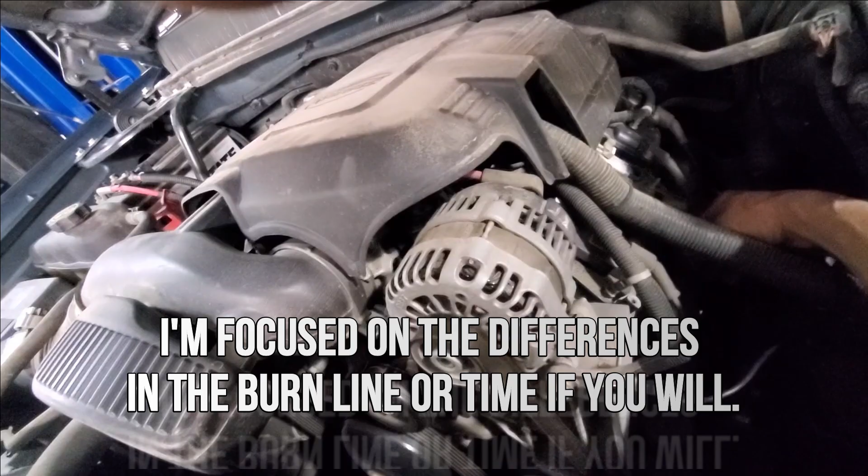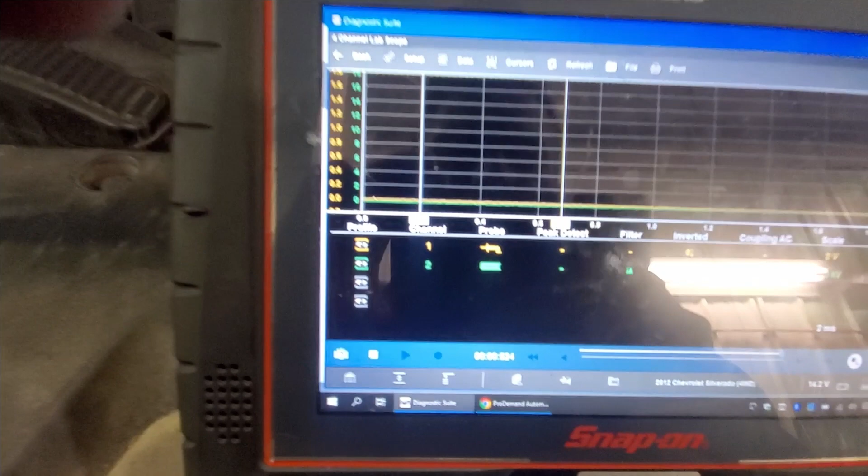And we had misfires on several other cylinders as well. Alright, let's see what we got here. We are on, just so you know, a 2-volt scale on trace 1, which is our yellow trace, inverted just because I got my amp clamp on wrong like usual. And then 20 kV ignition probe. We're on our ignition probe setup. Filtered, of course, and then 2 millisecond screen for the 20 kV scale to get that secondary capture.

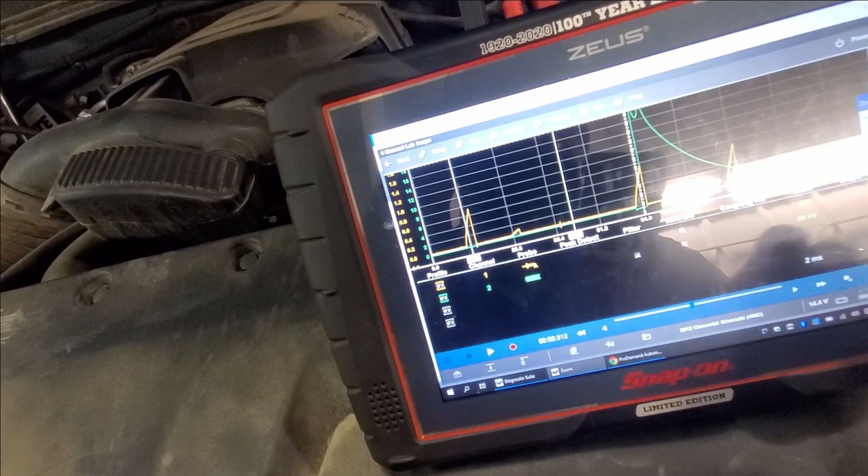Let's go ahead and take a look at this, see what this number 3 cylinder looks like. Zoom in on that. Come back out again a little bit here. So I don't know if you can see that, the difference there at idle. Let me come out a little bit more. I might have to increase my scale here so you can see it a little better. Let's go to a 50 kV scale. Stop, zoom. Yeah, there. Should be able to see that a little bit better now. Zoom in on that.

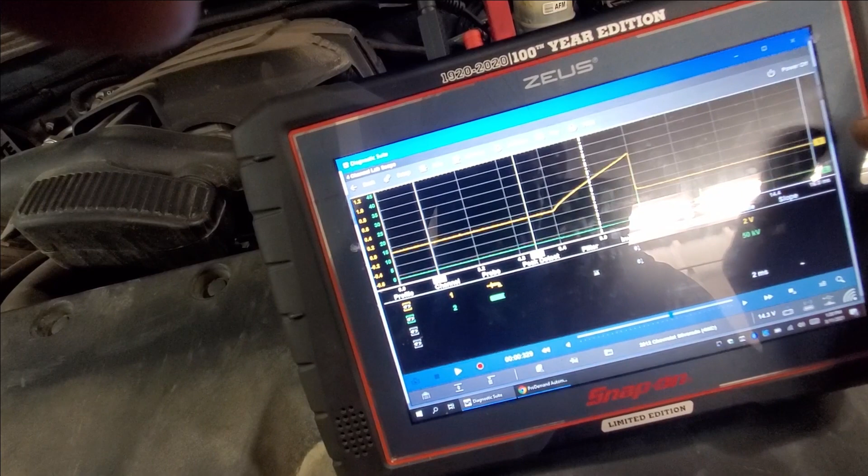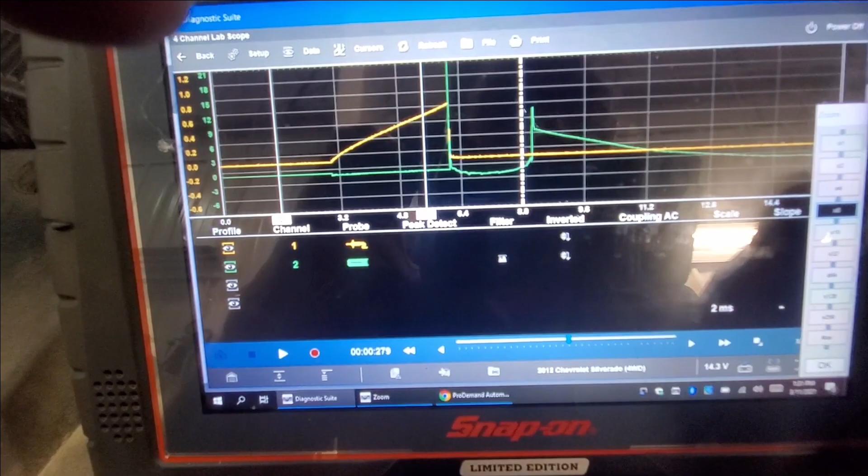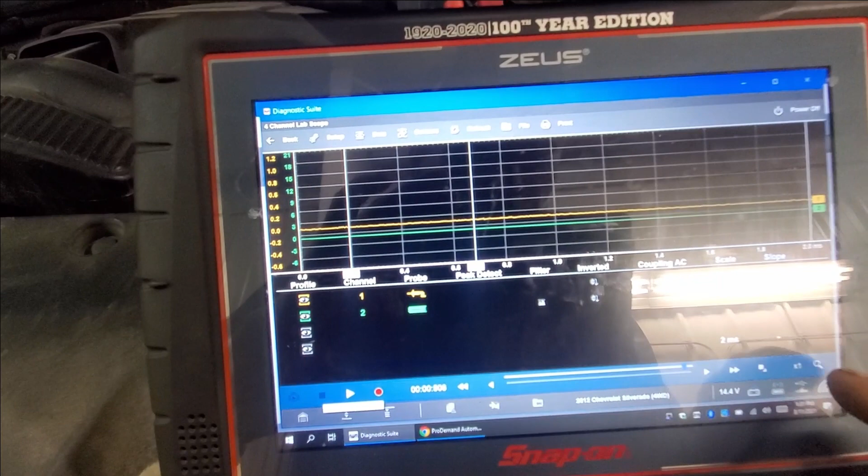Alright. So we'll bring this up. Again, here's our primary. This is our secondary. Oh, that might be too much. Hold on. Come back down to a 30 kV. Alright. Zoom in on this guy right here. So there's our secondary capture on cylinder number 3. Back to number 1. That one.

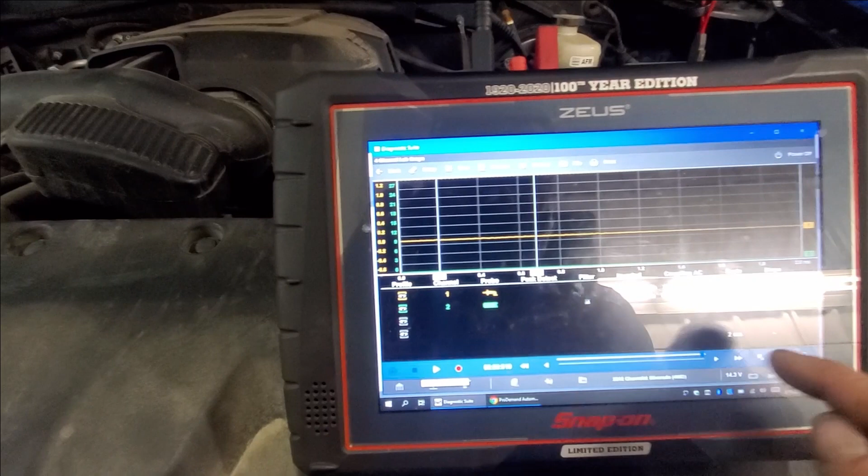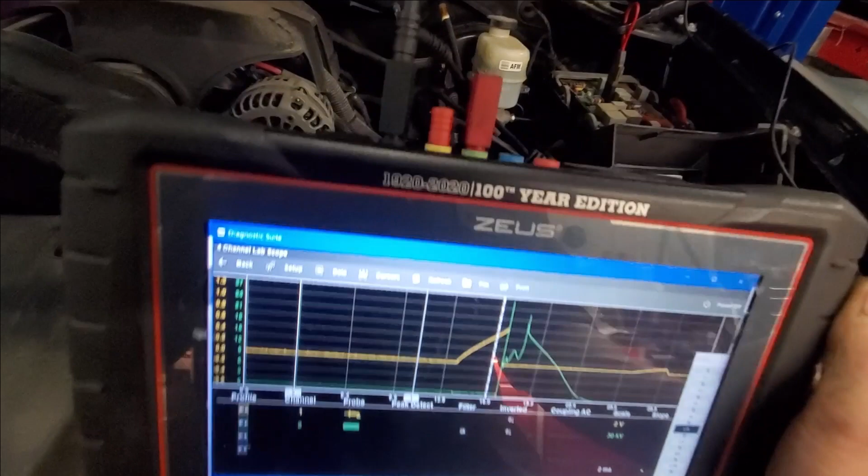So see that turbulence in there, right? That is in our burn time. So let's swap those spark plugs and see if the pattern moves with it. So that's what I believe we have as a secondary issue. Wait 1 second. All right. I guess before we do that, we'll do a quick clear flood and let you guys listen to it. Sounds good to me. Definitely not a compression problem or a mechanical problem.

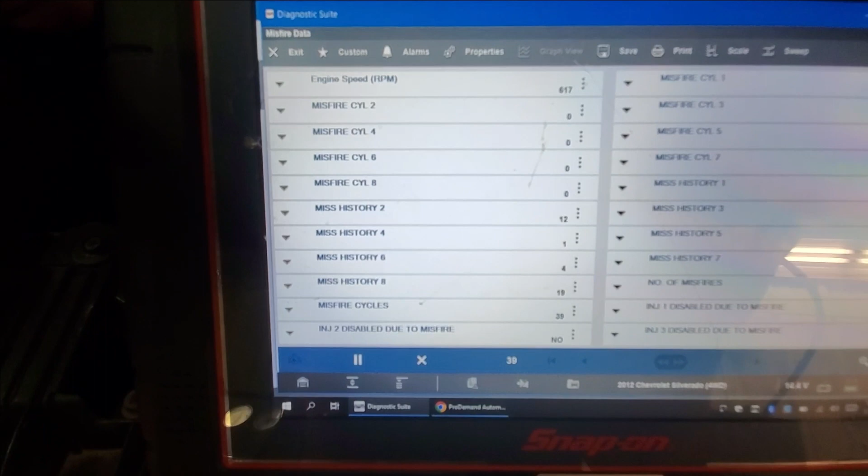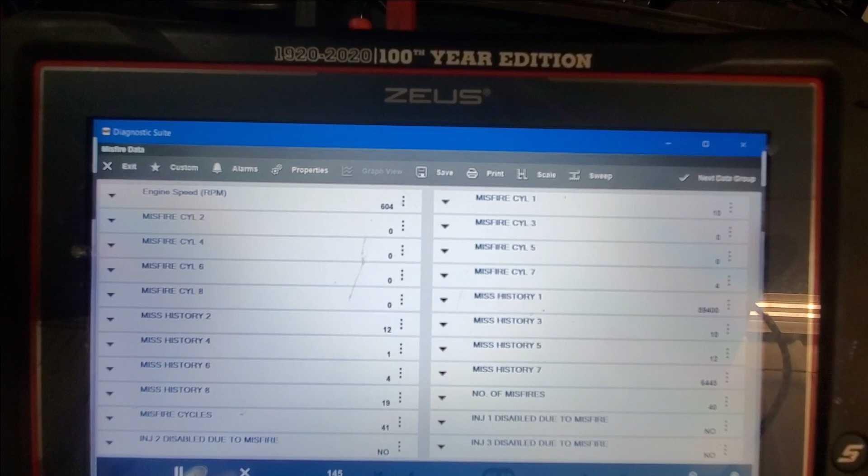Alright, since we got it up, let's take a look at some misfire data real quick. And you can see we have our miss history down there. Cylinders 2, 4, 6, and 8 had a few misfires. You can see we had a lot of misfires on cylinder 1 and quite a few on cylinder 7. You can see cylinder 7 is missing, as well as cylinder 1. Okay. 7 and 1. Consistently misfiring on the current counters.

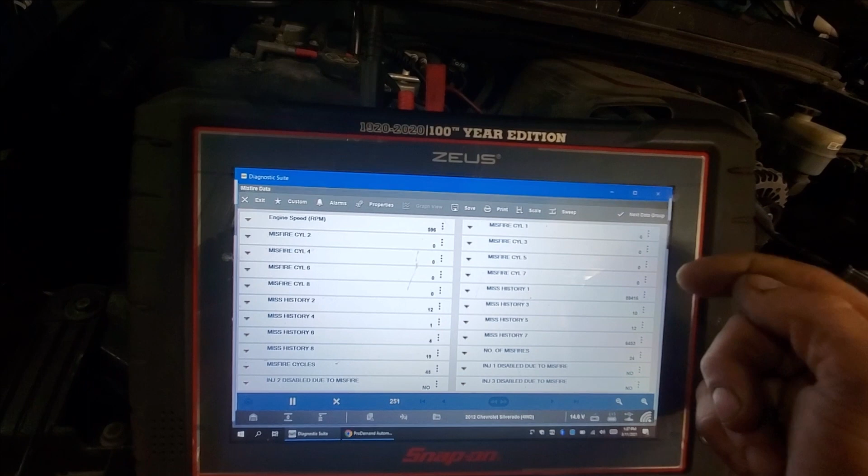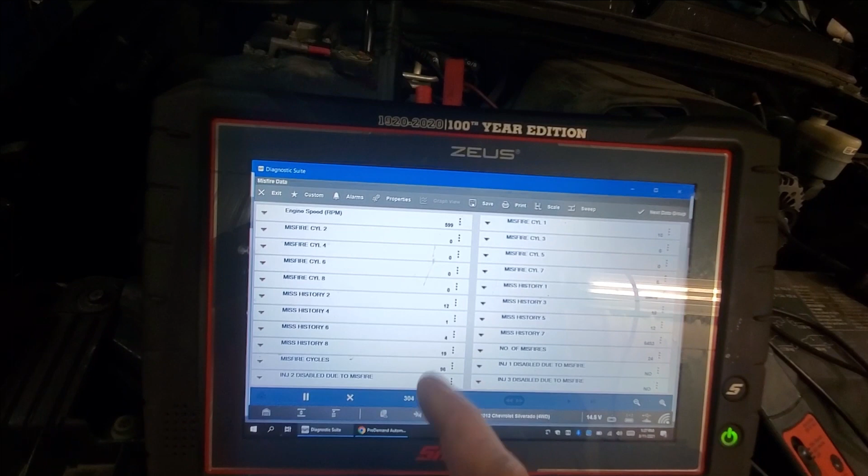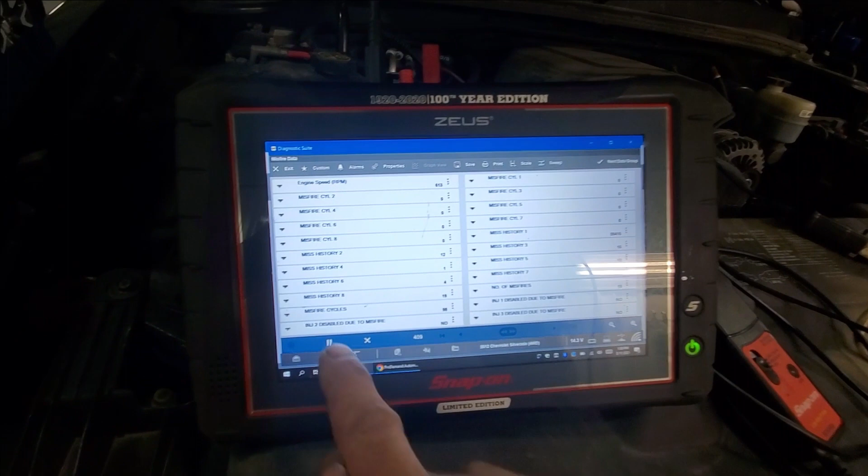Yes, I'm aware of the carboning of rings, so we'll keep that in mind. Also got to remember 1 and 7 are AFM cylinders, your active fuel management cylinders, so something to keep in mind. But we're at idle right now. Just observing, it looks like it's got original plugs and wires in it, so that's an observation. Let's see here, what do we want to do next? We're going to swap plugs, right? Why is my brain not working right now? Yeah, that's what we're going to do. We're going to swap them. So, let's do that.

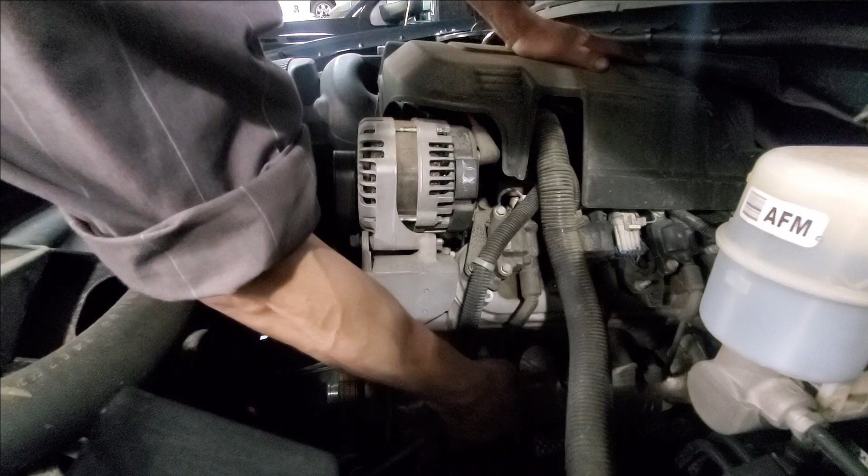Alright. Just going to swap out number 1 with number 3. Spin these a little bit. And the reason I'm doing this is because it's the easiest way to do it on a Chevy, in my opinion. To each their own though.

Like they say, there's multiple ways to skin a cat. Run it over with the car. Throw it in a sack, throw it in a river. I'm just kidding. Just kidding, I like cats.

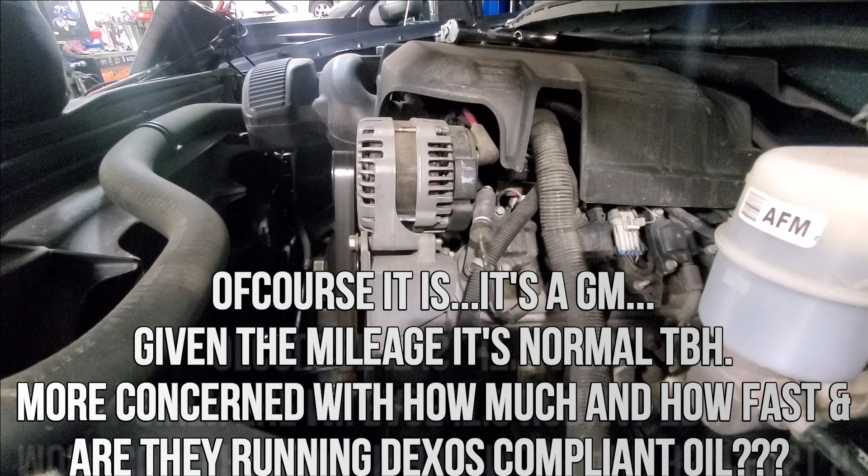Alright. Let's take a look. Uh-oh. A lot of weight. This thing's burning oil. Yep, burning oil. Oh boy. That's not good. Time to soak the cylinders down with some BG or some top end. I might have spoke too soon. Let's update this valve cover right away. Put the updated valve cover on it. Oh, come on. Of course I ran it, so it's piping hot. There we go. Alright.

I don't even know what the mileage is on this thing. I didn't even look, to be honest with you guys. Kind of doing things backwards today. I'm in one of them moods. But we're still going to swap them. But, you know, are we dealing with a fouled plug because of oil burning?

Alright, let's see what this one looks like. Yeah.

Does Nate like a piece of butterscotch or a... Oh, Paul, you are my butterscotch, Paul. When you came over here and asked me if I wanted some butterscotch, Paul, I was like, you are my butterscotch. Butterscotch pudding. Oh, I'll give you some butterscotch pudding. Oh, no, I'm good. Thank you, Paul. Ooh, is that a mint? Yeah, well, no, it's a candy cane mint. It's kind of like the mints I leave on your sister's pillow when I'm done. I am. Yeah, but that's good. You're that good humor anyway. Yeah, that is good humor, Paul. Yep. That's what makes life worth living. Like you're gonna keep making a mess of the sink because I got one on top of you there. Paul, I am a mess.

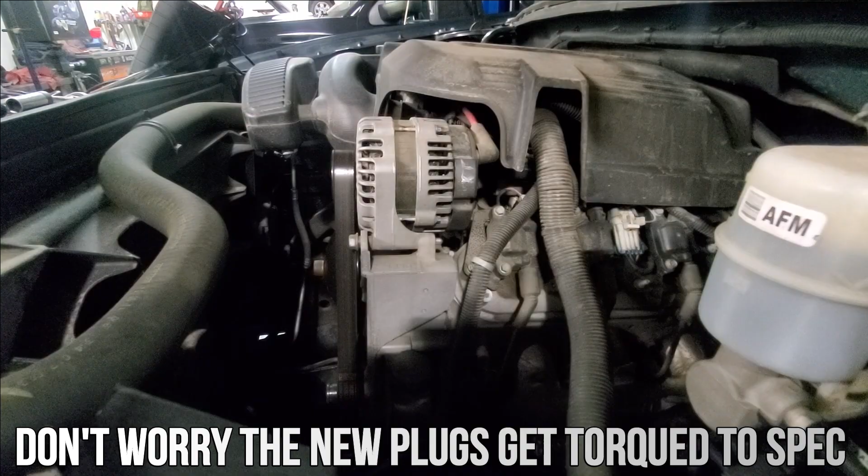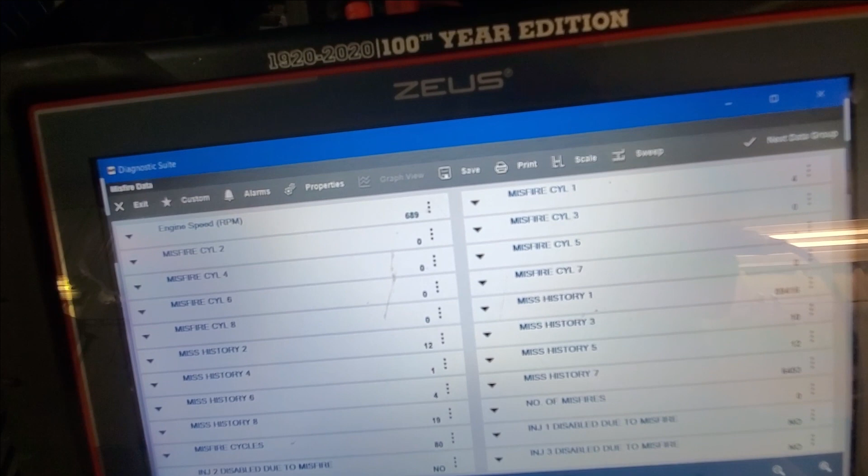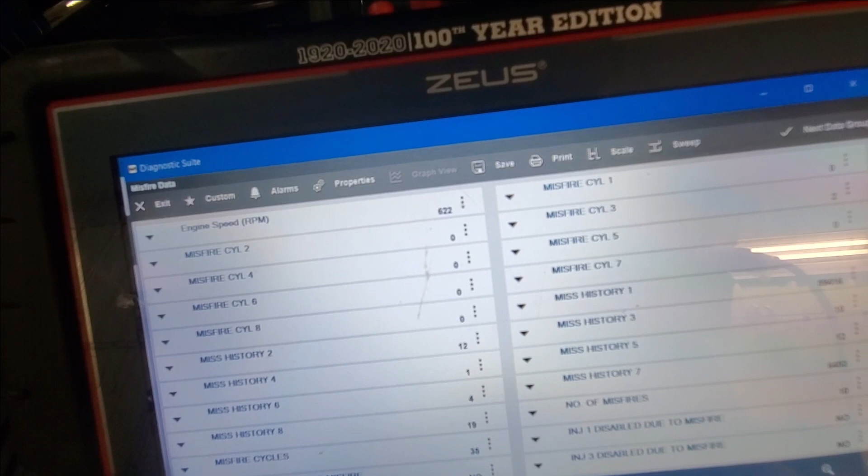Right. All right, well, we're going to see if this misfire moves. All right. Okay. This thing is still recording. Well, hey, while you're in here, you want to fire it up? Thank you. See if our number one misfire moved. Oh boy, sure did not. Sure did not. Oh, yes it did. Said coming out of 4-wheel drive, it just kind of acts up. But there it is. There it is.

Yeah, we got fouled spark plugs. Okay. She's burning some oil, man. All right. So clearly we have a plug problem, right? That was that turbulence we were seeing. So, is she probably burning some oil? Well, she's got 149,000 on it. I looked at that. So, yeah, probably burning some oil. I could recommend doing that service on the rings. Just let them know, it's probably bypassing a little bit. Is what it is. Or just throw a set of plugs and wires in it and call it a day.

But I'm pretty confident that the plug fouled out just from mileage. And, of course it's going to burn a little oil. I mean, it's a Chevy. Let's just be clear here. And it all depends on what kind of oil they've been running. If you're not running Dexos, that's a big deal. So let's get some captures on, well, really, we don't need to get captures. You already know, right? Just by moving the plug.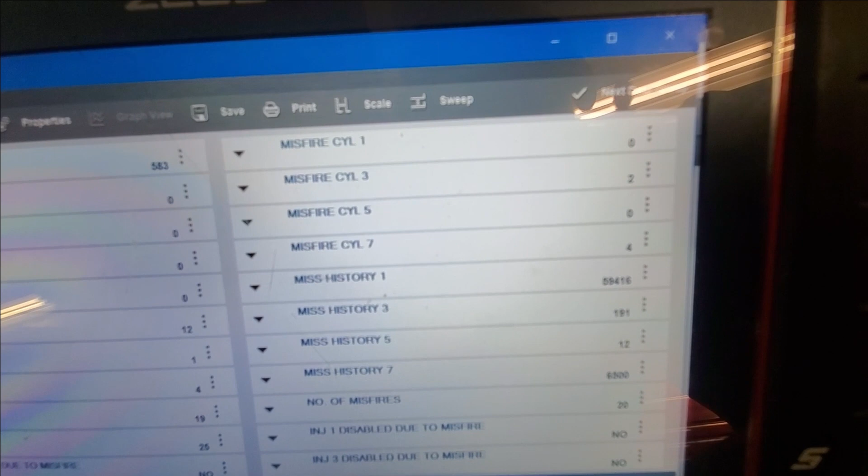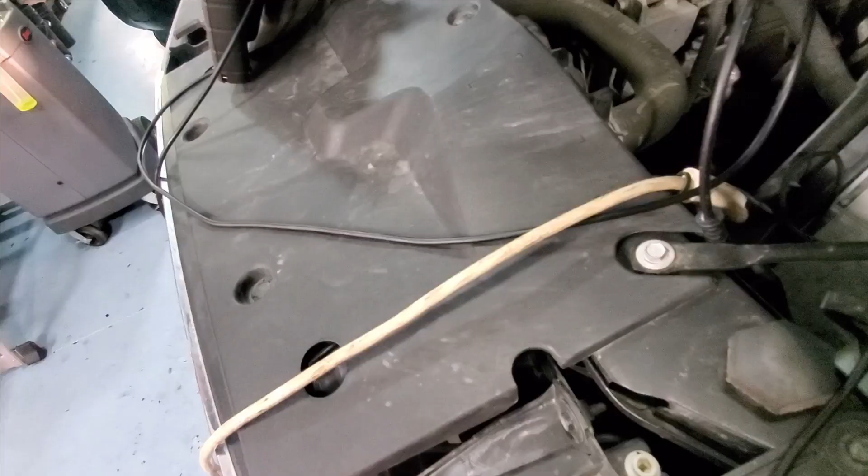Cylinder 7 is also counting up. Well, you can see now too, like cylinder 3 has kind of stopped counting. Oh, there it is. A couple on there now. So 7's another problem child. Like I said, 1 and 7 are your shutdown cylinders on this bank 1. What'll happen is there's an update for the oil pressure relief valve that lives in the oil pan that a lot of guys should know about, but there's a deflector that you're supposed to put on there. And that prevents it from slinging oil up onto the bottom of the piston on number 7 and causing a compression problem. Okay, I forgot where I was at.

So here's what we're gonna do. We are gonna recommend doing a Valvoline GDI or induction and injection service. This thing's got 149K on it, and we'll advise the customer that we believe it's burning a little bit of oil. Oh, when was its last oil change? I'm looking at the history here, guys. Well, it wasn't here, because the last time it got an oil change here was at 126,000 and we're at 149,000. So hopefully they've been putting Dexos in it. So let me check the oil level real quick. I mean, it's going to get an oil change with it. I'm going to highly recommend one.

So Valvoline, we do Valvoline here, BG or any GM top tier, whatever induction service you want to do. That should help quite a bit, actually. I've had pretty good success with it without doing where you actually pull the spark plugs out, dump it in the hole, let it sit overnight, come back in, blow it all out, and then rotate the cylinders over to loosen up the deposits on the rings. I guess we got to find out how much they've been consuming and if they've been running Dexos or not. Nevertheless, my recommendation is going to be to do an induction, injector service, some plugs and wires, and an oil change, and ship it. And it'll probably be just fine. Not probably, it will.

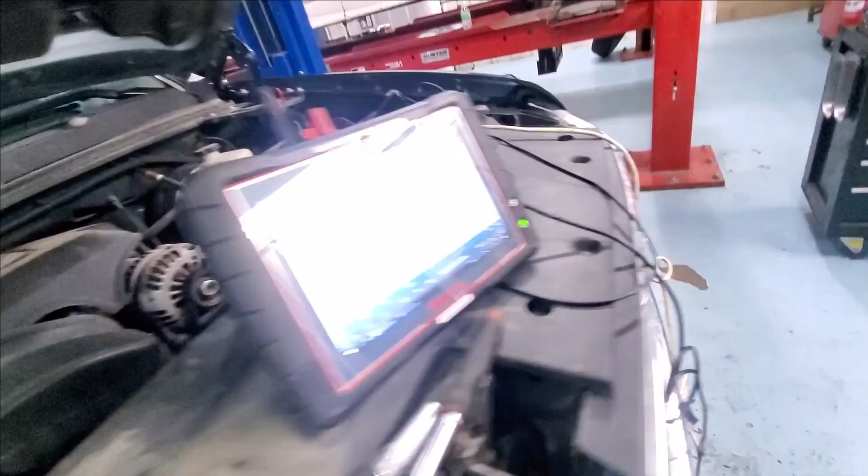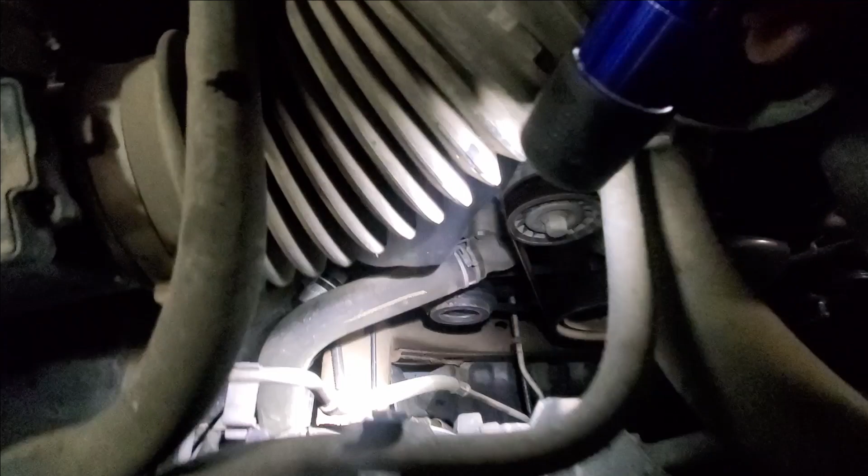Let's take a look at that oil level. Alright, that ain't low. Don't smell like fuel, at least nothing out of the ordinary. Yeah, oil cooler lines are leaking. Time for both sets of belts. Oh, tranny lines are leaking. Yep. Valve covers are surprisingly dry. That looks good.

This oil pan puked out. Not too bad. Them oil cooler lines are puked. I better double check the front here. Oh. Surprisingly dry. Oh, is that all coming from? It's gotta all be coming from the cooler lines. Yeah, it's coming from the cooler. Alright, well, we'll let them know about that.

Why do I see some oil on the back side of that head? Is that oil? It is not. Okay. Alright. Very good. Alright. Can number 1 of our intake cleaner. Running her through the throttle body.

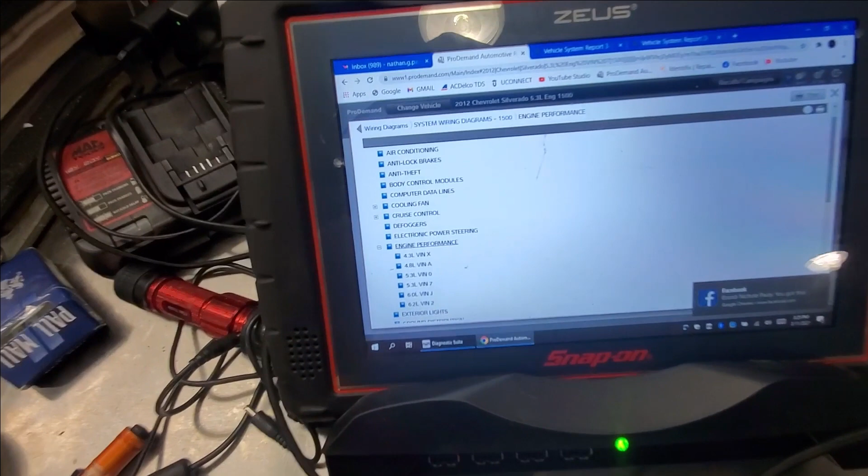Alright. Let's figure out how we're going to disable this fuel because this induction service is pretty much done. We got a VIN 7 5.3, so I got to figure out which fuse I got to pull to disable our fuel pump. So we're just going to find our fuel pump. It's not that one. That one is if it has multiple tanks, which this doesn't. Let's see here. Fuel pump, trailer brake control module with integrated brake. Okay. So we're gonna disable our fuel pump module up by the spare by taking its battery positive away, which is gonna be this one right here, our FSCM fuse 21, 20 amp underhood fuse block. So let's find that.

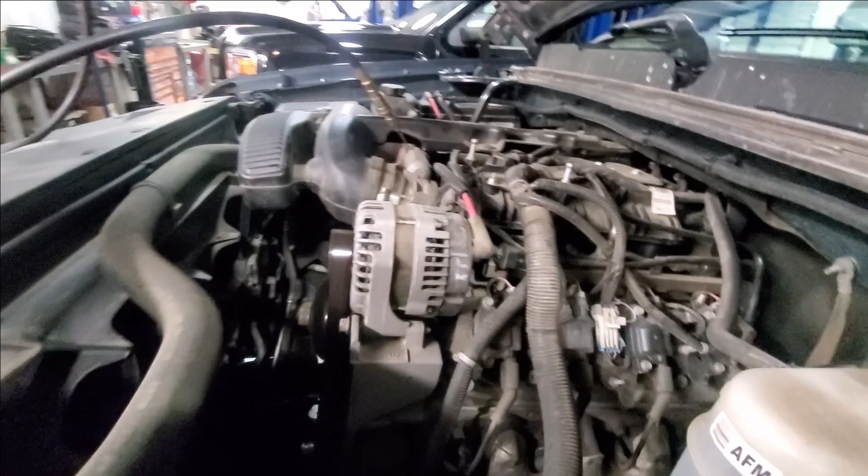So it's still running the induction service. I'm just gonna let it run as long as I possibly can, because even though I induce it at 70 psi, it'll still pull up in the intake. Then of course we'll have to take it for a good 15-minute test drive to burn out the rest. The stuff continues to work long after the actual service.

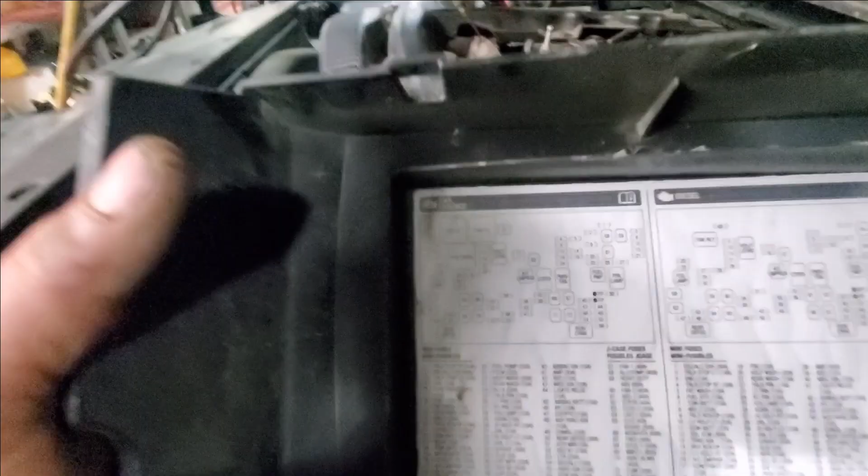So let's see here, FSCM fuse 20 amp, fuse 21, there it is, 20 amp, and here it's a 25 amp. Fuse 21, where are ya? Oh geez, there it is, right up there. Okay, so this is 25 amp right here. We're gonna pluck it. Got my fuse puller here. That'll disable our fuel.

And the way you know these are done is when you shake it, you'll see little drops coming out through the sight glass where it goes in. And you'll also see your pressure drop on both gauges. So I know the tank's empty. So we're just gonna shut her down and disconnect that connector, reconnect the intake pipe to the throttle body, and then we just got to disconnect fuel here. We'll cycle key, confirm that we do have fuel disabled once we pull our fuse, and then we just hook into the rail and add our fuel rail cleaner, and we'll run our fuel service. That takes the longest. We'll just run it till it dies, and then once all that's done, start doing our plugs and wires, okay?

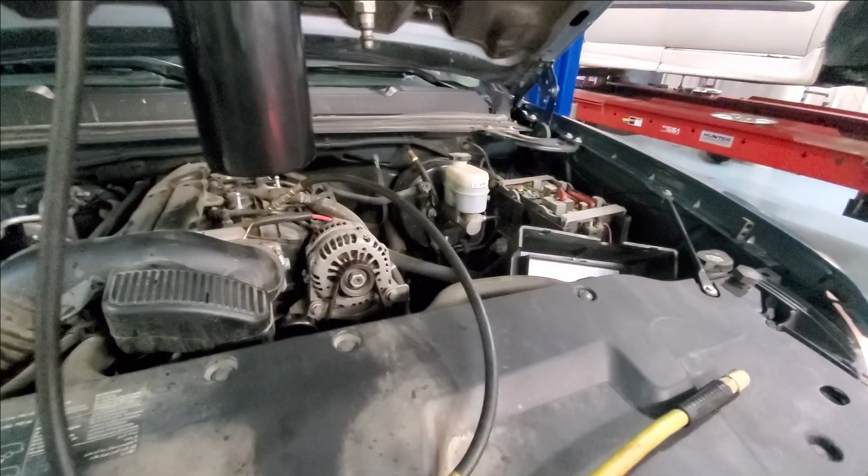Alright, so let's disconnect this. Disconnect the air. We're going to open up the relief valve here. There we go. We'll disconnect this. And shut our valve. And then fill our tank. Let's go ahead and pull this fuse right away. Alright, fuse is out.

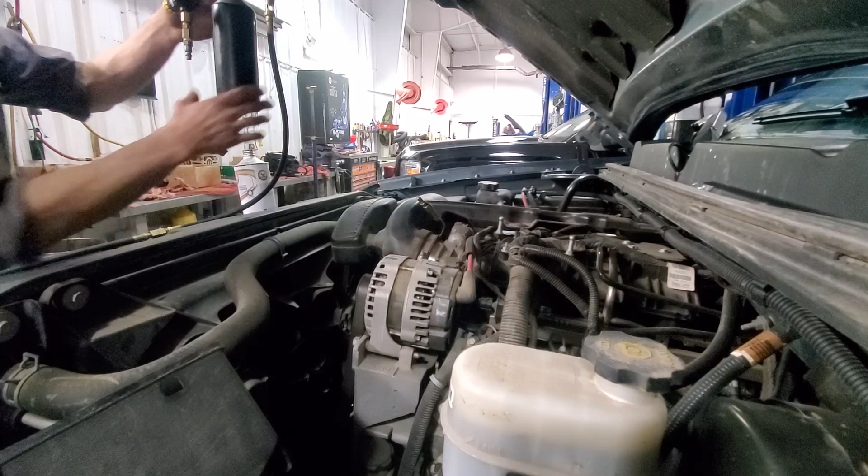And naturally, my phone's about to die when I'm starting to make a video, so I'd plug it in. It's Thursday, guys. You know what that means? I don't. Business is kind of slowed down. I don't know if everyone's waiting for their tax money or what, but it's kind of slowed down a little bit, which is unusual because usually I stay pretty busy. It'll pick back up again. It'll be slammed in no time.

Pretty sure that's the guy I need. And let's see, I've already disabled our fuel, so grab a rag and then we'll disconnect the fuel here. Yeah. She's gonna spurt a little bit. Grab a disconnect tool.

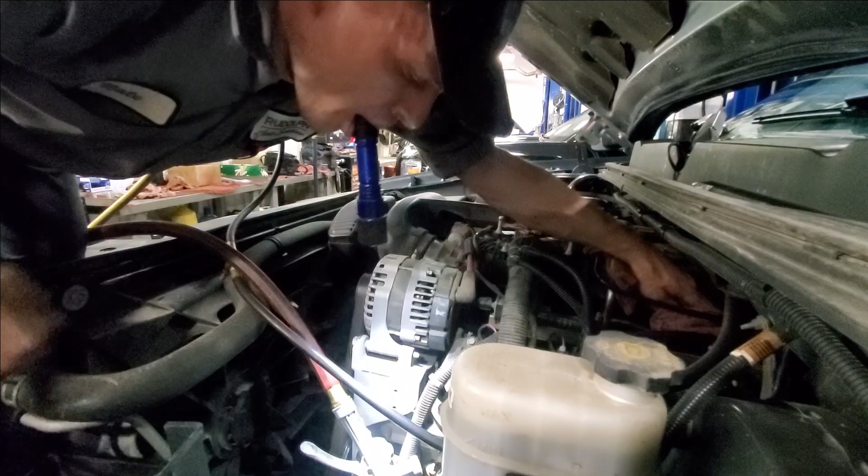Alright, she's dialed into about 65. Well, like I said, you might want to rinse her down with some water. I think we'll go ahead and do that. Don't get water in your supply to the rail, obviously. Just in case we have like an ignition arc or something, you never know, and it's safe. So I keep the water handy just in case.

So let me go grab an assistant and make sure we don't got fuel coming out. We'll have him cycle the key. Paul, can you come here and cycle this key to on for me? Alright. What now? Just cycle the key to on, Paul. Don't crank it. Ready? Yep, go ahead. Oh yeah. Alright, go ahead and start it, Paul. Alright, thanks, Paul. That's good.

So, slap some spark plugs in this guy, huh? Put our fuse back in for our fuel pump control module. Okay. And then I'm going to start tearing and getting all the plugs and wires done, okay? I'm not going to film that, guys. If you don't know how to do plugs and wires on the Chevy V8, you might not want to quit your day job.

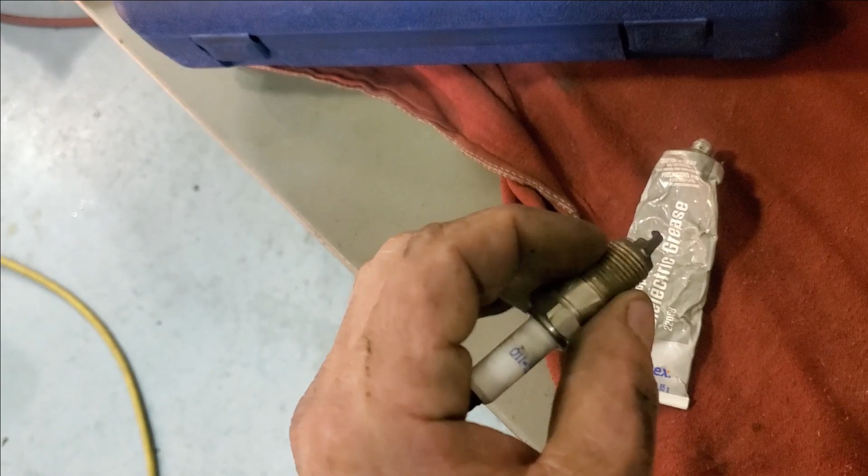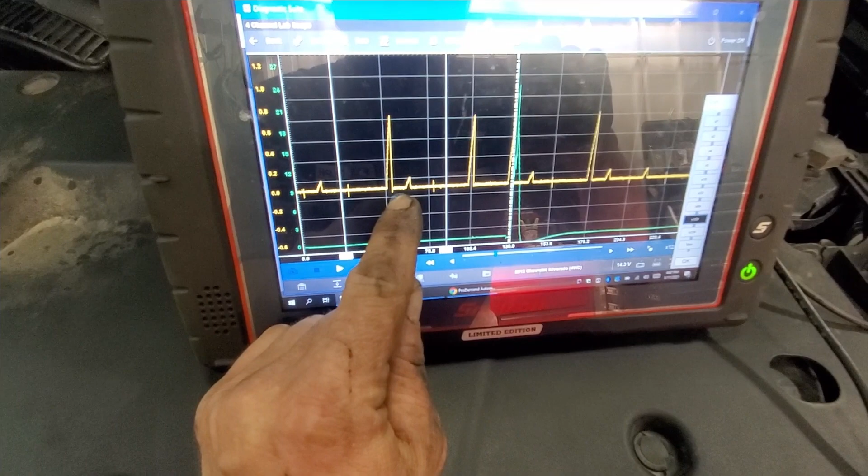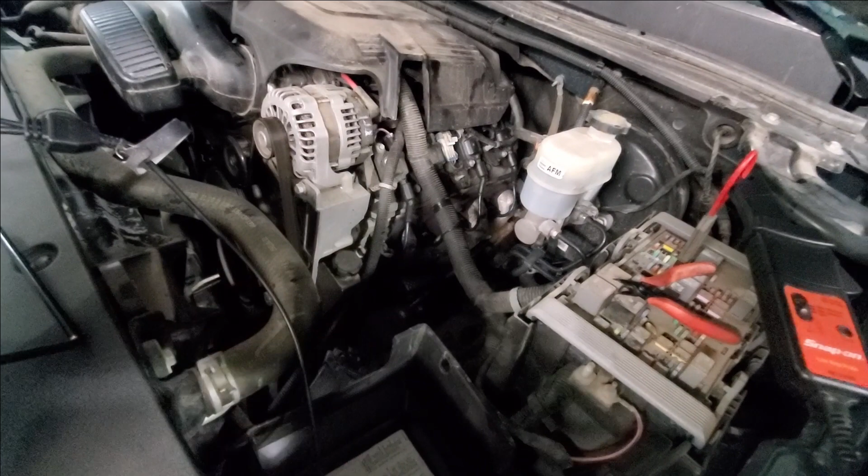Now, I just started it for the first time after running the induction. Again, this is our secondary and our primary on bank one, driver's side, right? This is going to be all of our injectors. The yellow trace here, you see these smaller ones? Those are the injector current ramps, okay? For bank one, as well as the primaries for all the bank one coils, okay? So again, this is the turbulence we had from that bad spark plug, okay? So now we're gonna check with the new spark plugs and new wires on it. And I'm gonna let this thing run for a little bit, burn out all the crap, because it's gonna run a little rough. It's still got stuff in the intake, but I'm gonna let it run for a little bit, okay?

Alright, sorry to cut it short, guys. I had to get going. We have to get this show on the road. I gotta get out of here. It's just 5 o'clock. I gotta pick my daughter up from daycare.

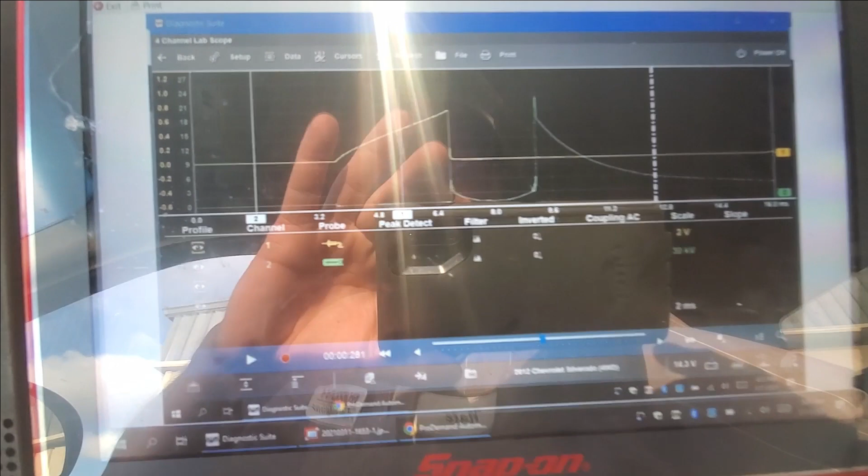So there is our after capture on cylinder 1. You can see there's a significant difference in our secondary. That is a good secondary on a Chevy V8. Alright, that's what it looks like, guys, at idle. Not snap throttle, at idle, with its primary. Alright, so obviously there's no turbulence in there anymore. I know this is fixed, okay?

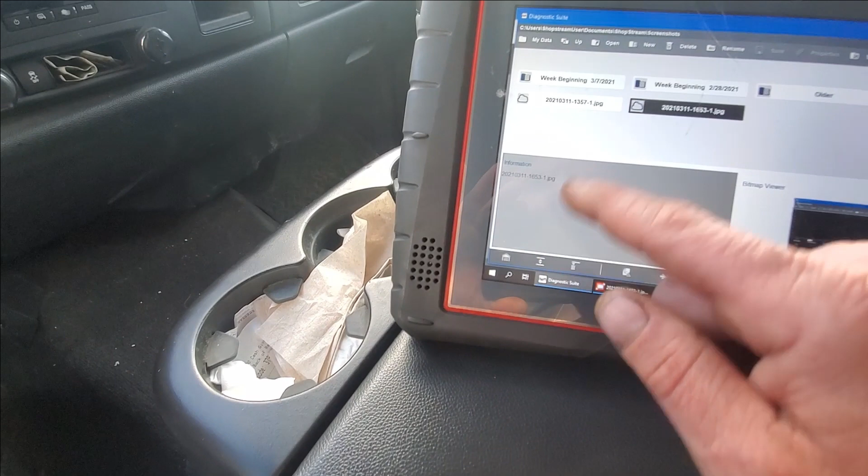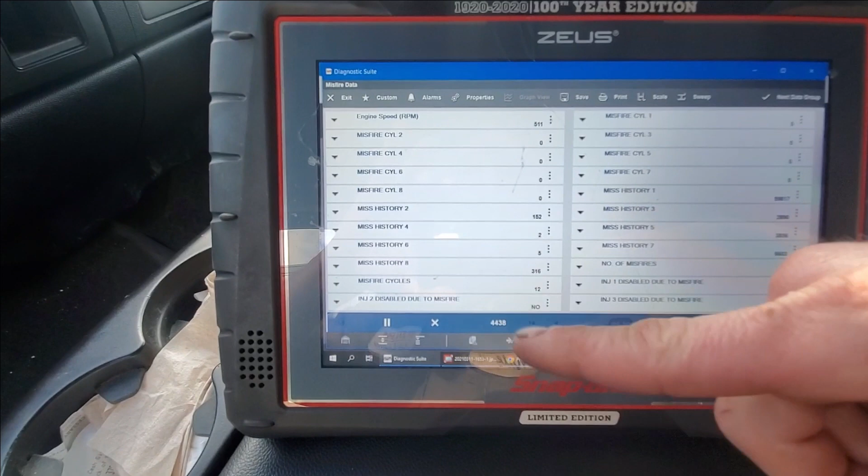If we go to our misfire counters, alright, and take a look here. I have not cleared codes yet, so you're still going to see misfire history in here, okay? But you're not seeing the active counts on any of the cylinders anymore, and it's running nice and smooth. Now, something to keep in mind is when you run these induction services, they'll misfire usually on the back 2 cylinders, 7 and 8, a little bit at idle, because it'll run a little rough until it burns all that crap out.

We still gotta clear all the codes out, and we'll do that after our drive. And then once we've cleared codes, we'll reset our fuel trims. We'll do a crank variation relearn, reset our idle. Okay.

We added this to the fuel system. This is the other part of the service, okay? And then you need to advise the customer to fill the tank, all right? Don't even bother looking at your trims because they're gonna be skewed due to the additive. And there's still gonna be remnants of that cleaner inside of the intake, okay? So your fuel trims are gonna be negative, all right?

Now she's gonna smoke when you start taking her down the road, so don't be stomping on it. You don't have to stomp on these to finish off the service. Just a nice smooth 10 to 15 minute drive. Don't get crazy with it, okay? And it'll just do the rest of the work on those valves and on those rings, all right? And the stuff works pretty dang good on these Chevys, from my experience.

Now, if you get one that's a little extreme, you might have to go the other route, like the TSB says, where you pull your spark plugs, you pour either a BG service or the actual GM AC Delco Top Engine Cleaner in there, and I usually let them soak overnight.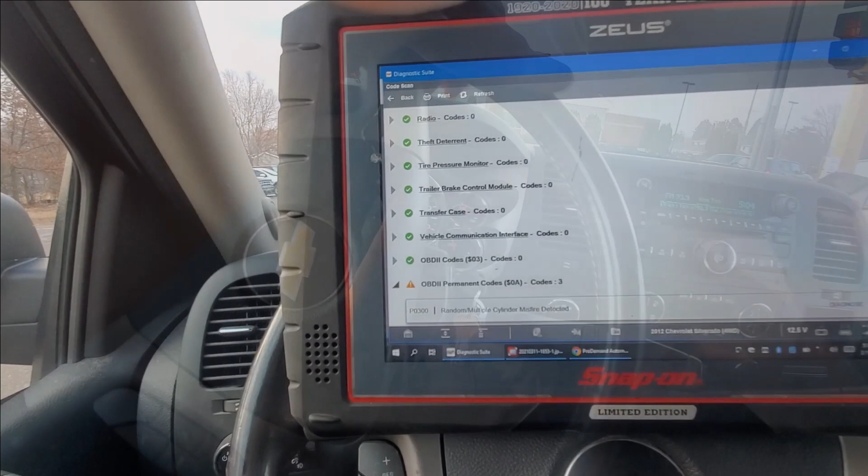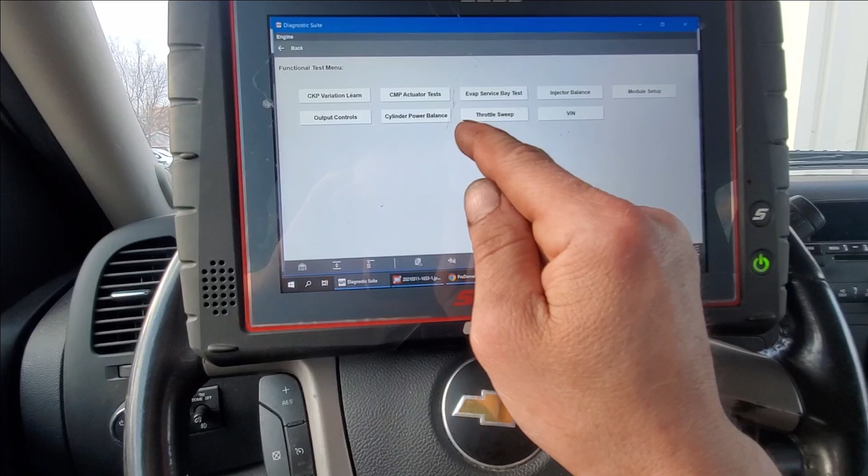On everything, you can see in our permanent codes, we got these lean codes. Again, these are stored codes because of when we were running the induction service. They'll go away once they pass. We're going to functional tests. Module setup, idle relearn. Continue. That's because we cleaned out the throttle body. So we'll reset that.

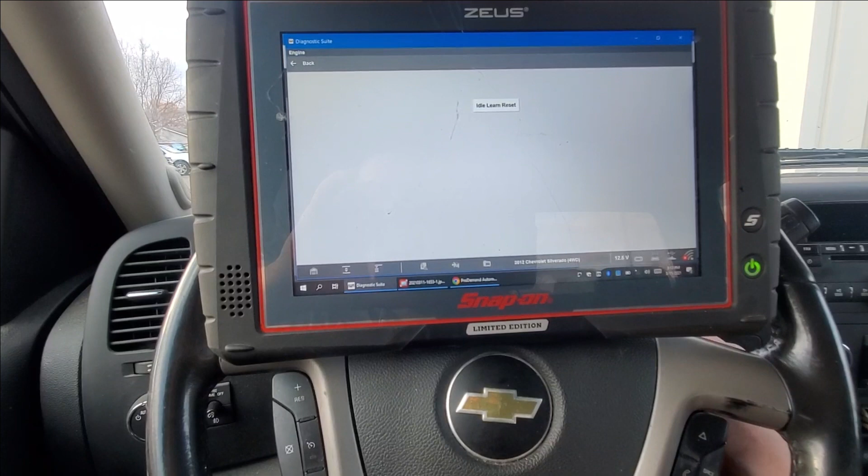Okay. And we'll cycle our key off. Turn it back on. Go back. Output controls. We're going to reset our fuel trims. Okay. And we'll reset our fuel comp too, because we're going to advise them to fill the tank, so it'll be all right. Let's go ahead and reset that.

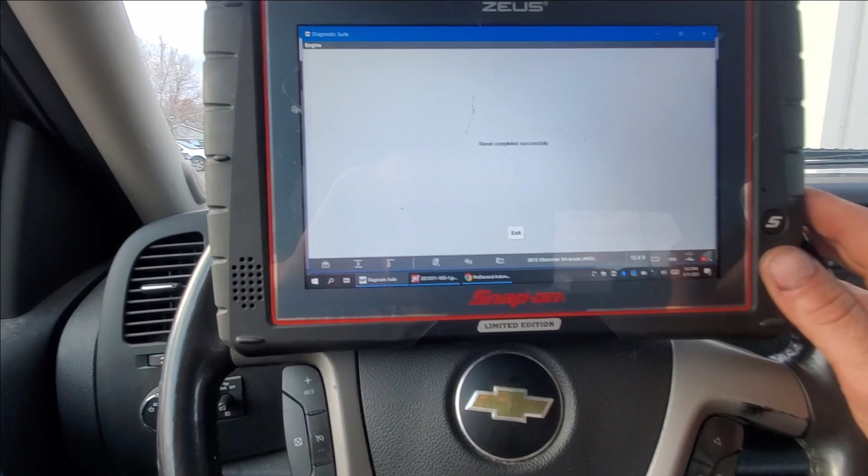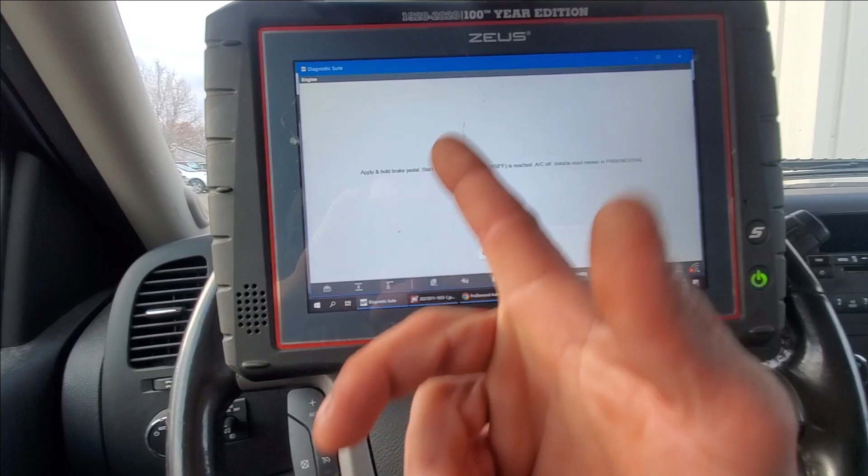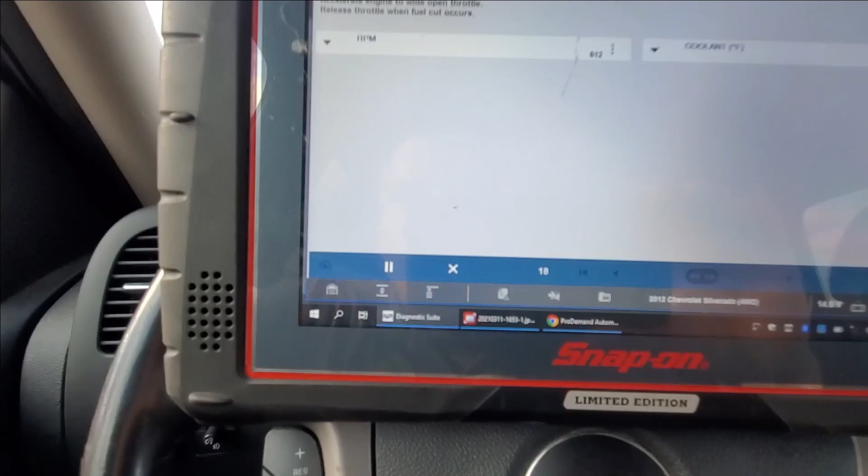All right. I'll come back out. Turn her off. Turn it on. Start it up. We're going to let it run for a few minutes here, let the idle stabilize. Hit continue. And what I'm in here now is the crank variation relearn. We're going to let it sit here and idle. You can see our idle's at 600, it's going to bounce around a little bit. It takes GMs a while to relearn their idle.

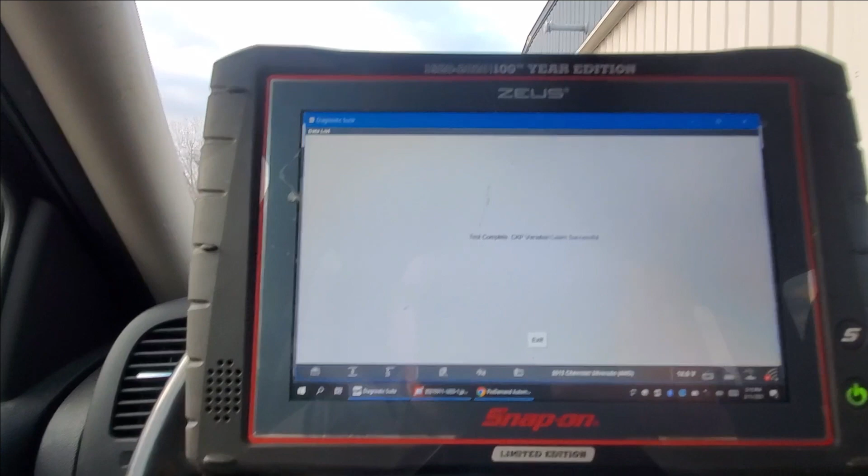All right, that should be good. Brake pedal down, and just give her wide open. All right, relearn successful, exit. Turn the key off. Fire it back up.

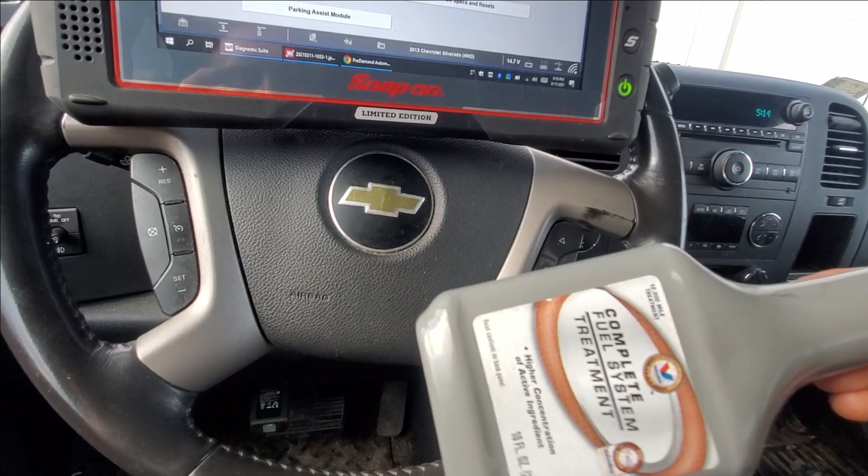Okay. And then you tell your customer, you're gonna have to fill the fuel tank all the way up, because we added the additive, and run it. It'll take probably a full tank of gas to finish the process of cleaning the valves. Basically all that stuff in the intake is going to sit in there, and it's just going to slowly work its magic on the valves and the rings, and then this additive continues the process on the injectors.

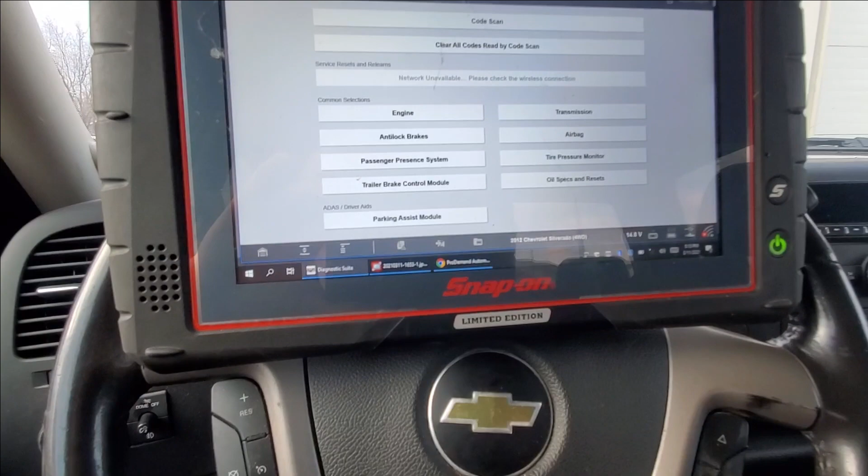Okay. Let's take a quick peek at engine. We'll go to data, take a peek at our misfire data. Now all of our history for misfire should be gone. It should be all zeros now because we cleared the mode 6. Yep. And no misfires. We got a couple on 8.

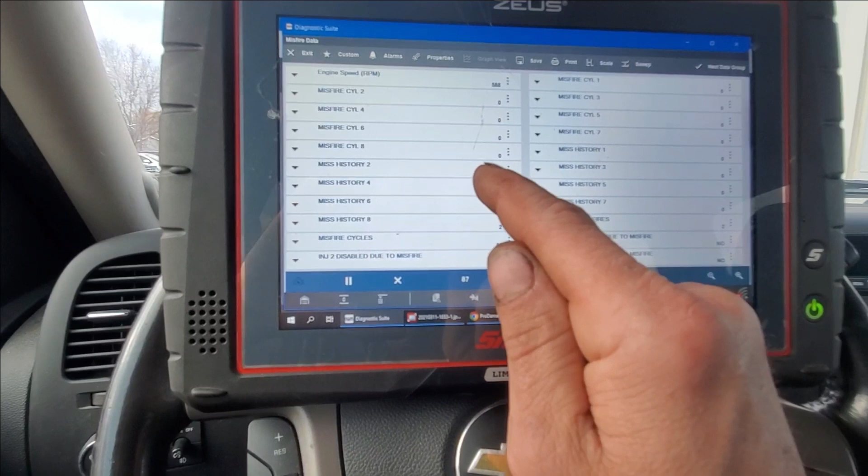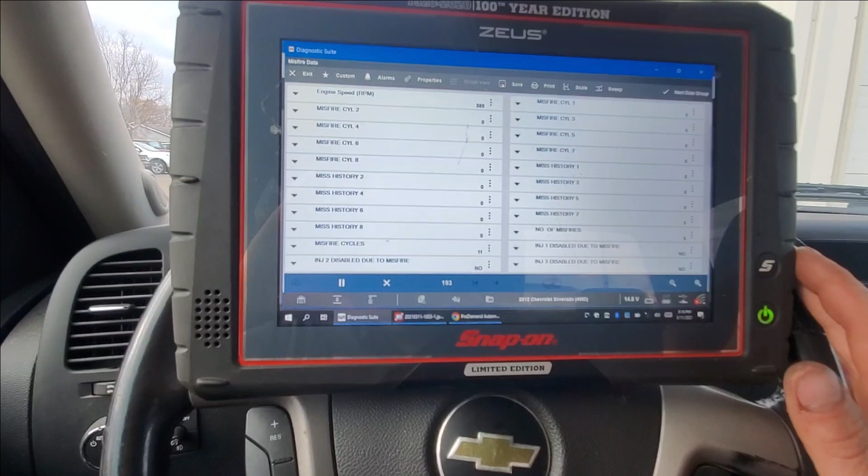Don't worry about that. If you see that after doing these induction services, that's okay. It's just going to happen every now and then. You're going to get a little bit of a fish bite at idle, and that's because of that induction service, okay? But you can see now we don't have that consistent misfire on number 1 counting up, or on number 7. Okay, so I'm okay with it. It's not going to set a P0300. It's not going to set a P0301. It's fixed.